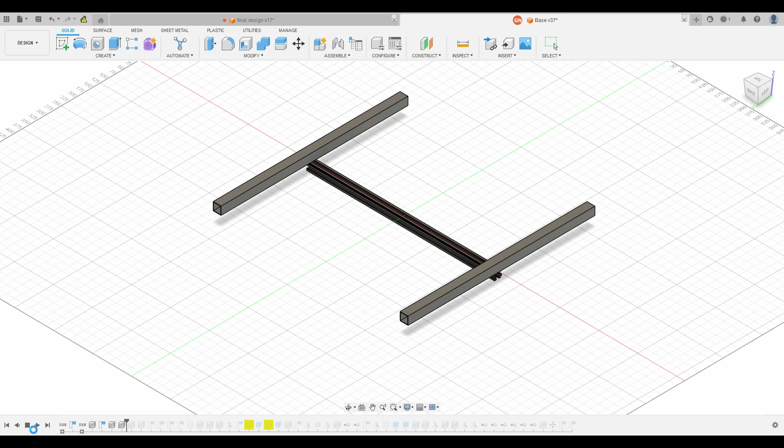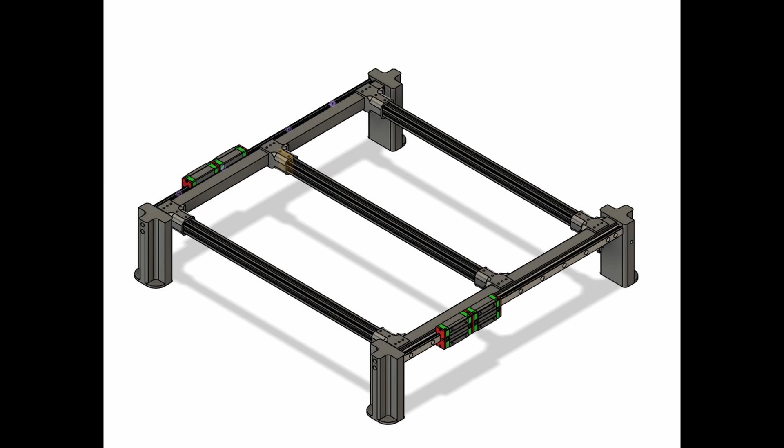Yeah, so for the base, we have all of our bars that you see here replaced with 80/20 bars, which you'll probably see a photo of here. And the 80/20 bars are made in imperial units, so it's 2 feet, and that is roughly 610 millimeters. That makes the bars that have the slides on. We mounted them right in the middle, so we have a little overshoot on both sides. And we thought that having 3 bars connecting those slide bars was strong enough.

So for the couplers that you saw in the base model earlier, we made 2 different types. One that has a flush side so it can run against the wall, and one for the middle that has the 2 prongs that you see now. These were made to join perpendicularly 2 different bars, very strong and kind of elegantly.

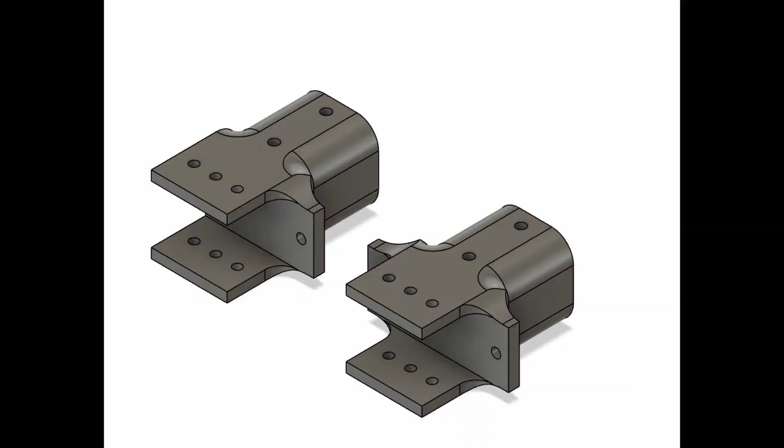So what you're about to see is my very quick design of the leg. There's like 3 versions of this, but this ended up being the final one as it has all the holes we need. Has a version with an inset for the end stop limit switch, and generally has a big surface area for the whole machine to rest on. So yeah, pretty quick, pretty easy, simple enough.

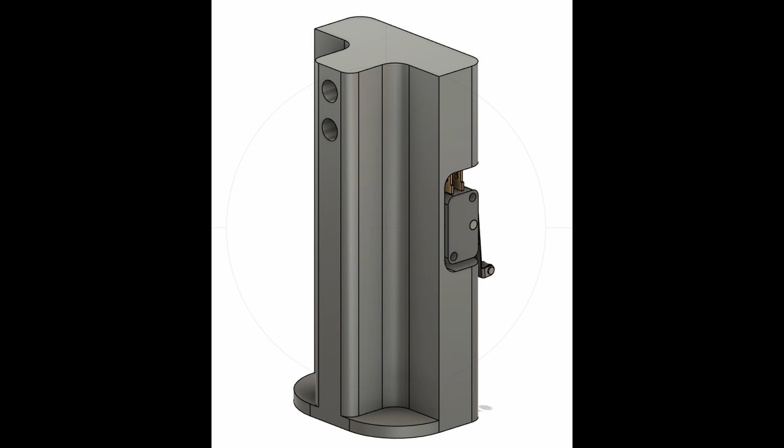This next feature here is fairly critical. This is the motor mount for both of our Y-axis motors. As we said in the first video, we're trying to drive with a dual Y system, so we had to make sure we had the motors in the right space, at the right height, far enough back so we don't compromise our build surface, and that's what you can see here.

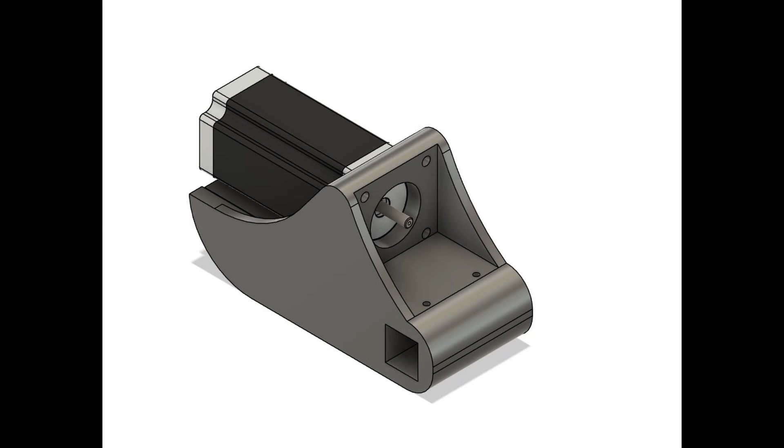This version we settled on is probably version like 3 or 4. Initially, we just had a rough one mocked up where it was too far forward, and then we changed it just to make sure we have the space for the lead screw and everything to fit correctly, and that's what you see here.

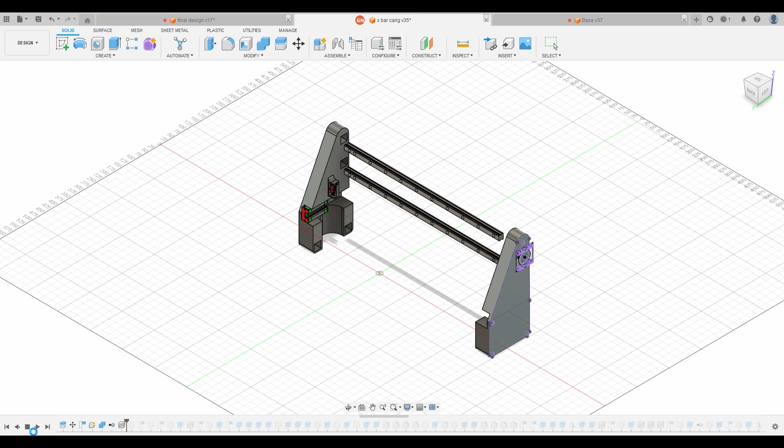For our X carriage, we spent most of our time here because this is a very crucial part and it takes a lot of filament to print, so we really only had one shot at this. So we have a parallel plate type of design, and we're going to have an underpass bar, 2 of them that you'll see. We inset the slides so then they are flush against the walls for a lower profile. And as you'll see, we've made 2 different versions of this piece, but we chose the latter version, as you'll see.

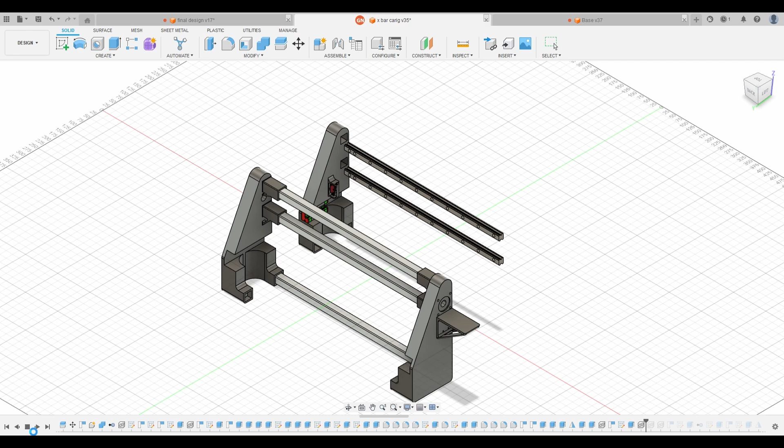When we got the 80/20 bar, we cut them down to 600 millimeters, so we have them all standardized. And I tried to make an extension off the sides because originally I was planning for something around 700 millimeters. And you'll see it right now. It gets cut off and replaced because we found some 80/20 bars that were the right length. That streamlined our print, cutting down almost an hour off each of the prints, which was amazing because most of our prints were 20 hours or so.

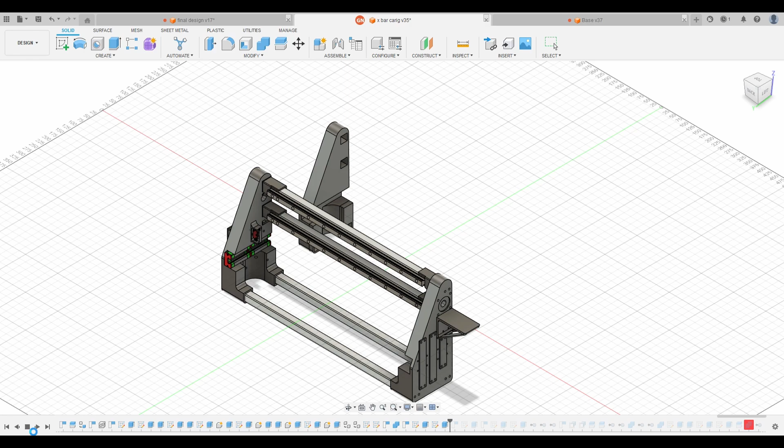On the sides, you could see aluminum plates being put in to reinforce that really thin area where the slides are. For the stepper motor, it's just a basic 4-hole mount. We put a little truss underneath it to help hold the supports.

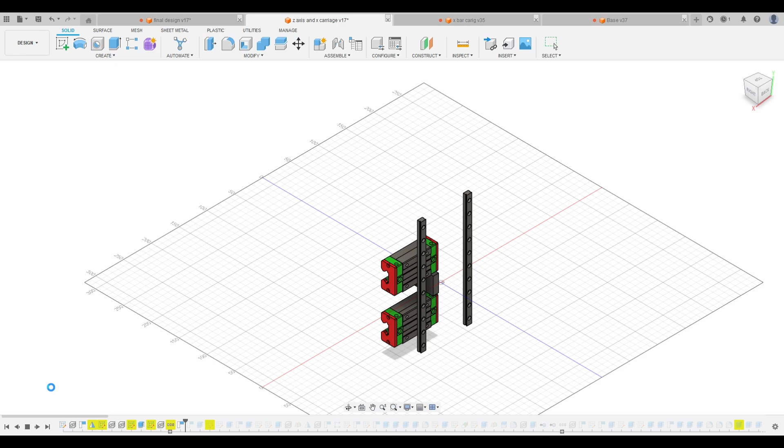So the next part we designed was the entire sub-assembly for the Z-axis, which is pretty critical. I wanted this to be as compact as possible and took some inspiration from stuff I saw online. Basically, you have two sliding linear rails, much smaller than the ones we were using for the X and Y, but two rails with a clamp system for the router, which you can see I just put in there. And it just slides up and down.

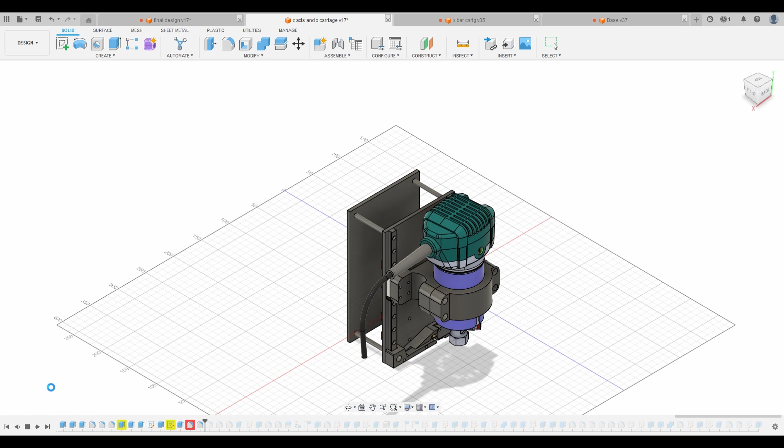At the bottom, I made a nice little custom end stop thing with a fitting for the limit switch and some holes for wire management. Soon in here, after I finish touching it up, you'll see I begin to add the stuff for the lead screws as we got it, and then I add in the mount for the stepper motor, which we just decided we would mount vertically.

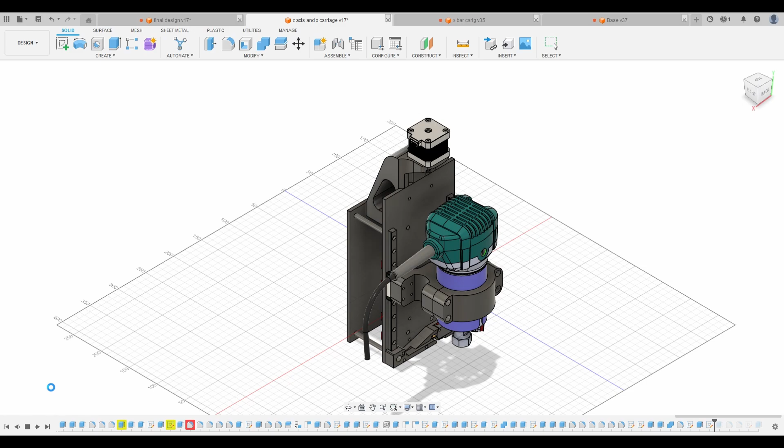There was some deciding between trying to belt drive it because the space between the two plates you can see is actually almost perfect for that. But we decided that would be a lot of extra effort, a lot of dealing with belts, a lot of stuff we did not want to really mess with. So we just decided we would mount it vertically. And yeah, that's what ended up working.

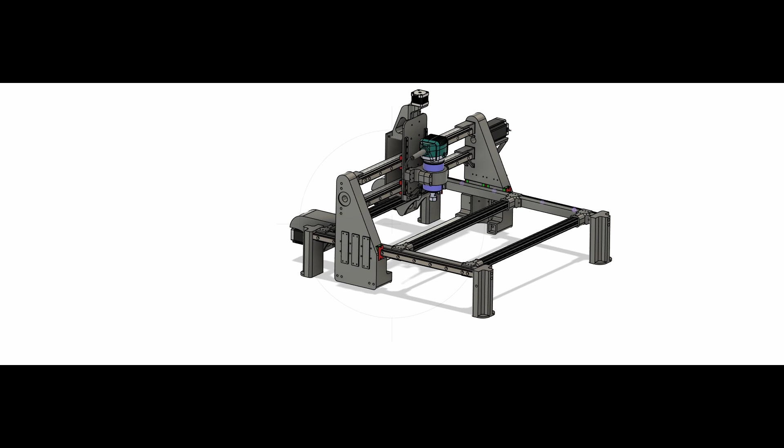Nice. So yeah, that was the CAD finished, and it's on to the assembly process now. Yeah, it's been quite a while making this CAD model. It's been really a journey going through this. Pretty fun. Yeah, a lot of time. I think we learned a lot. It looks great in theory. Hopefully it works. Yeah, I know. But the integration between CAD and real life is sometimes not the most fun. Yeah, but we'll see how this goes.

We have three printers, and we've already ordered a lot of the materials, so we're excited to try and optimize this print process for as little pain as possible.